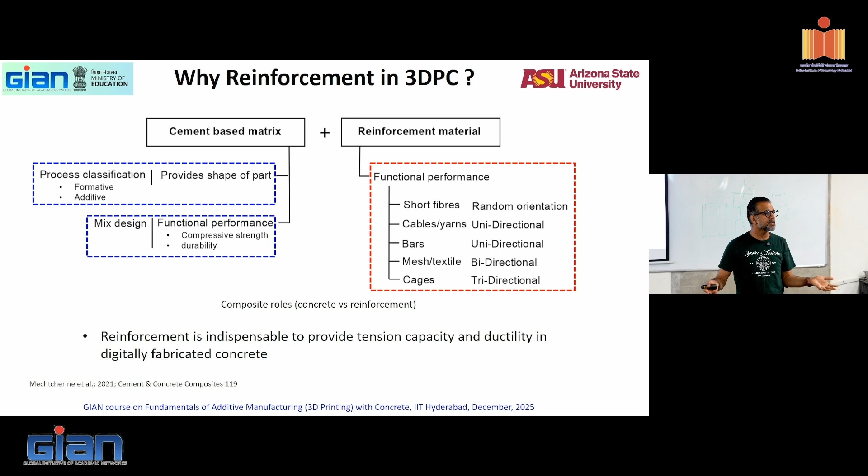But at the end of the day, you reinforce for a function, and the function has to come based on your design, and therefore the reinforcement should follow your design. And the design is not going to be a prismatic member that is conventionally reinforced, because if that's the case, you don't need a 3D print. You can simply put the rebar and pour concrete. There's nothing easier than that. We all have done it for centuries.

All right, so here is reinforcement in conventional concrete construction. Very easy, this is somebody who, you can look at that. So it's a paper on additive manufacturing. So they look at 10 advantages of extrusion-based printing. I don't know why 10, they could have added more.

And then the systems-based approach to evaluation of reinforcement strategies. And they came up with a very nice, even though mostly an academic, but useful framework to find out the suitability and degree of system integration of various reinforcement strategies. Not surprisingly, right? There should be common sense. What is the best strategy that they find out?

Fibers. Of course, right? That's the best strategy. That's what, in terms of suitability and degree of system integration, and then additively manufactured rebar. So as you print your concrete, you have another extruder that extrudes steel also, which means you have a 1600 degrees Celsius melt of your material coming into extrude. Don't know how that happens. You can do it. Or you can do an FRP extrusion.

If you're using fiber reinforced plastic, you can do fiber FRP polymer extrusion along with rebar. But all of those will get infinitely complicated. You look at how organized and how many different activities have to go.

So think about this very simple idea, right? You have to keep on extruding one layer, and then the layers right below have been printed and they are covered with gunny bags that you saw yesterday. They are spraying water. While you are spraying water to prevent shrinkage cracking, can you think about a fiber reinforced extruder coming along with it and getting sprayed with water? Practically there are several challenges of co-extrusion.

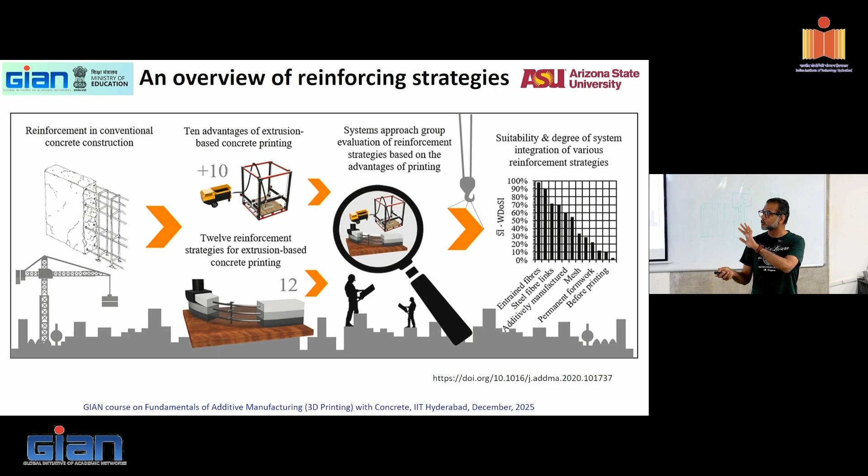Pre-installed wire meshes. You can see here pre-installed meshes, and this nozzle printing in between the wire meshes, squishing the concrete so that it goes in between the meshes too, and then you keep building it up so that both nozzles squish enough and the layers join each other. Two nozzles come together to form one layer, because there is rebar in between, and then the concrete comes in between.

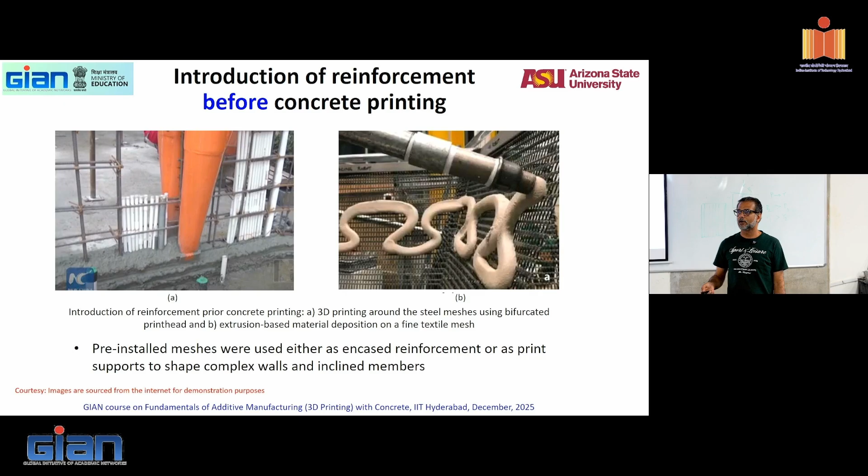Frankly, if you ask me, I would do a formwork if I need that. Correct? It's difficult. It's challenging. I mean, you can do it, but how much coordination, how much work is required? You can do it. It's not that you can't.

Reinforcement integration during printing. Here is another mesh. You can see you have completely redesigned the nozzle. The nozzle now has a lip in the middle, where the mesh is. So you have to position the mesh exactly straight, because your printing path is in that direction. If you manually place that mesh and have a 1 millimeter tolerance difference, at some point your nozzle is going to hit the mesh. So it has to go very precisely through it, which means tolerances become extremely important.

Have we been able in the concrete industry to get to 0.1 mm tolerances? Have we been able to do that? When we are able to do that, this will become an interesting idea. Until then, I can do it in the lab. I can do linear things with reinforcement, but the moment I have a curved section, I'll have to have a bar bender coming in and doing it. It's the same problems I end up with using rebar in concrete. So more challenges in that zone. But again, people have done all of this in a laboratory.

Now, weld joints of reinforcement. I have vertical reinforcement, no problem. I'll put it with horizontal reinforcement. What do I do? When do I go and tie this thing? I can't tie it in, because a tie is going to protrude out, and now my printer will not extrude carefully. Now I have to go and weld there, right? Adds another layer of complexity.

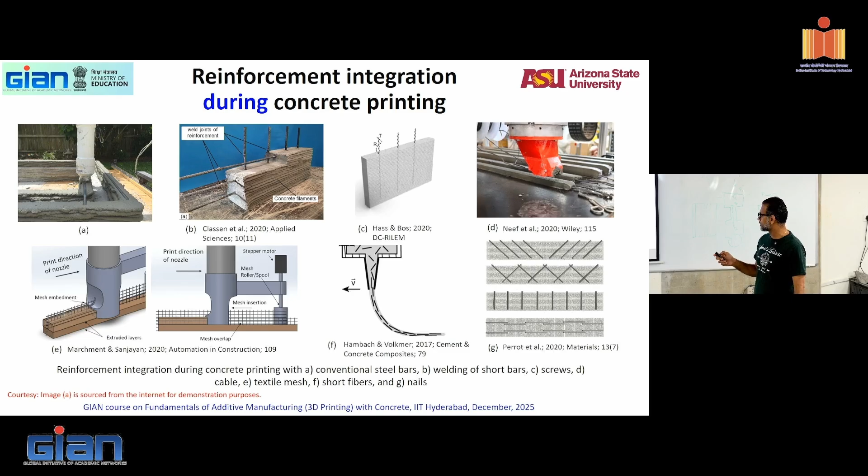That's also possible, it's not that it's impossible. But what is one of the biggest advantages of 3D printing? Reduction of labor. What did you add now? One guy to come and walk along with the printer to put rebar. You're losing another advantage. There is nothing that you gain without losing something. There's always a compromise, that's a choice you have to make. Like I said, I'm not here to give you the answers, I'm here to show you the problems.

Reinforcement integration during printing, the other thing: here is a cut section of something that was printed with reinforcement. You see that unevenness on the sides? It's not going to bond to steel really, really well. So that's another issue. Here is an additively manufactured reinforcement, where the reinforcement itself is all additively manufactured while you're printing it, which means you have a steel company right next to your printing process as you do it.

In a small scale laboratory setup, you can do whatever you want. I can create a Mars vehicle and say I've gone to Mars here in the lab. You created the temperature, the harsh roughness, but you forgot the oxygen. If you go to Mars, you don't have that. The bigger problem is what you forgot - all the easier ones you solve. That's what we do in the lab most of the time: I solve a problem in a condition that is most convenient for me to solve, and you ignore the bigger problem that is in the field.

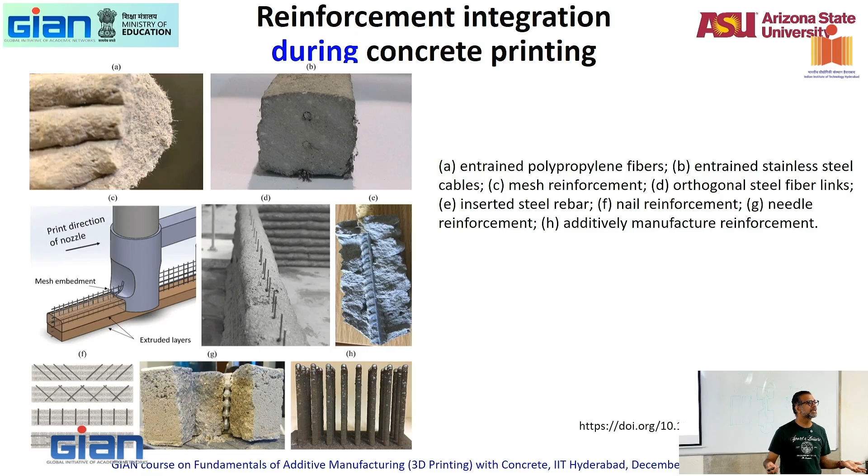I've gotten 200 megapascal concrete. How did I do it? I was sitting for half an hour consolidating this small piece of a cube, and I get so much strength. In the field, I forget that I don't make 5 specimens, and I forget that I can't consolidate 10 cubic meters of concrete sitting like this. In labs you can get lots of things, so translation is where the issues happen.

Here is one example of external reinforcing - a truss system, very similar to what you saw before. They printed the truss system and then had external cables reinforcing it. The problem is, I can put this in the field and somebody comes and decides to cut this external reinforcement, and my structure has no more stability, no more strength. So vandalism is a big problem - structural vandalism, structural fire, people breaking things - very common all over the world.

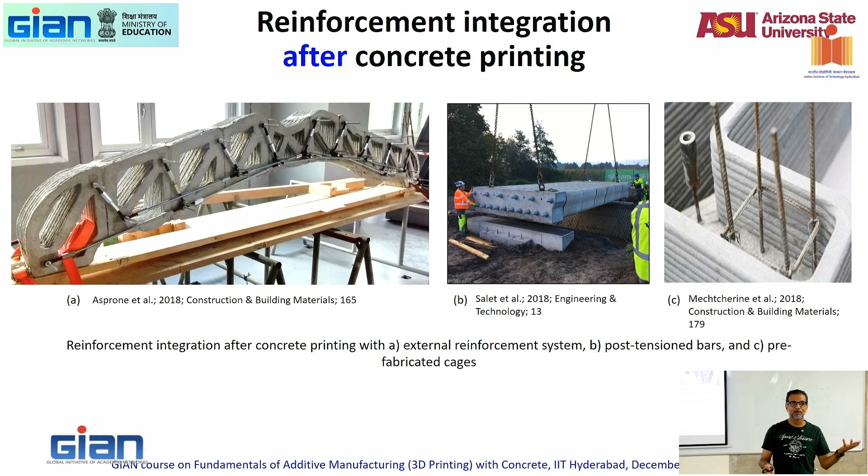So do we have to do that? Are there ways of doing it better? We do all of this - I've done this too in one of the buildings we built in Tempe. At that time, the only way to get the local code official to accept the building was to print the walls and then every 6 feet have columns, physically put rebar and grout in between, leaving the rest of my 30 megapascal concrete useless in terms of load carrying capability, because the entire load now comes through the columns. The rest of it is just sitting there watching - drying shrinkage, no problem, let it shrink, it's doing nothing. But again, these are the practical problems in dealing with these materials.

Reinforcement strategies using steel bar - here you see different shapes again. What they're doing is, after a certain number of layers, they put in rebars. You print these layers, put in the rebar cage, and then you get this. How did you get this from this? Any idea?

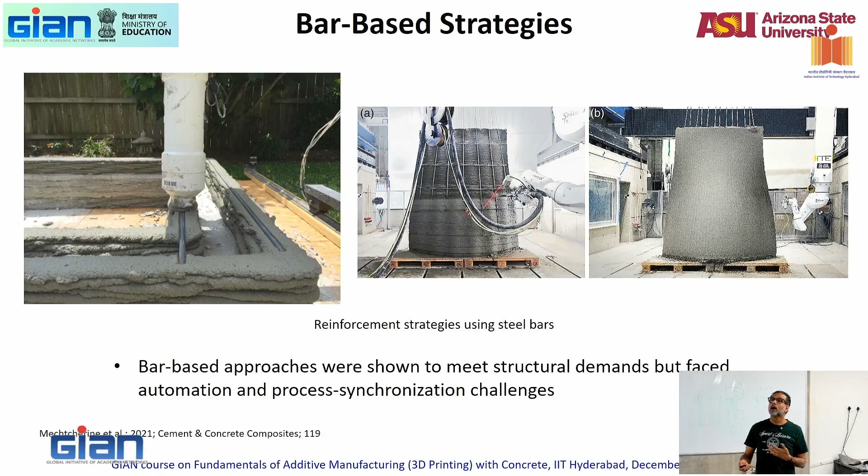Shotcrete on the surface. So you basically print a layer, do the rebar, put all the rebar as per the design, and then shotcrete on the surface to get your structural shape. You get it done faster because shapes can be done only by printing. You have the rebar problem, you need reinforcement, you put the reinforcement, you shotcrete. Unique structures possible.

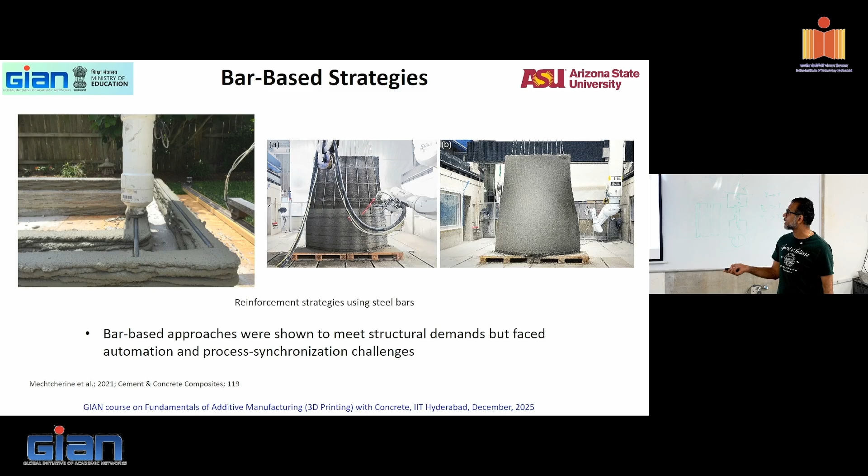Meshes and cages, remember this one I told you? You have a rebar mesh that's put in, but then two nozzles are coming in and doing it, which means you can do it straight, but as long as you start to curve, you will have a problem with shapes. So straight structures, you can do more of this nicely.

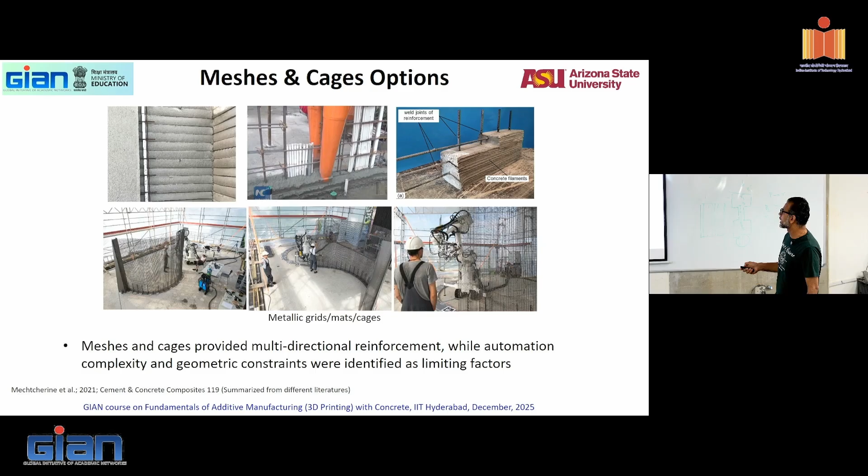We've seen this here, where metallic grids and mats and cages are all being done. Here is a way where cables are being interlaid through the nozzle, an interlayer integration. The nozzle is putting your concrete in, and then a cable puller is pulling a cable on the layer below. So you have a cable puller placing the layer, and once you end it, you might cut it, and the cable won't be there anymore, but the concrete will go continuously. So instead of a man placing a rebar, you have an automated machine placing a cable. Process principle exactly the same, and you can do that as well.

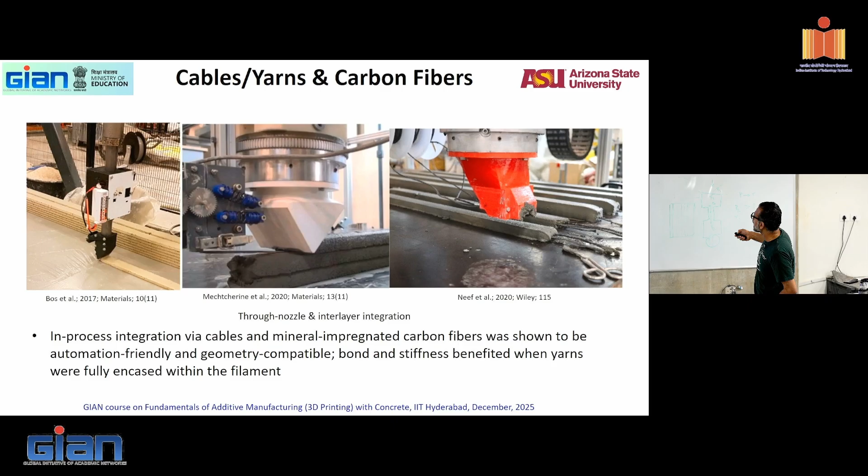Here is another way in which you have put in rebar and placed it the same way. You have these two different nozzles coming in and covering the rebars, so you can do that as well. If you have lots of different meshes, then you adjust your nozzles in such a way that you can drive through this, like a web getting more and more complicated. Mesh insertion.

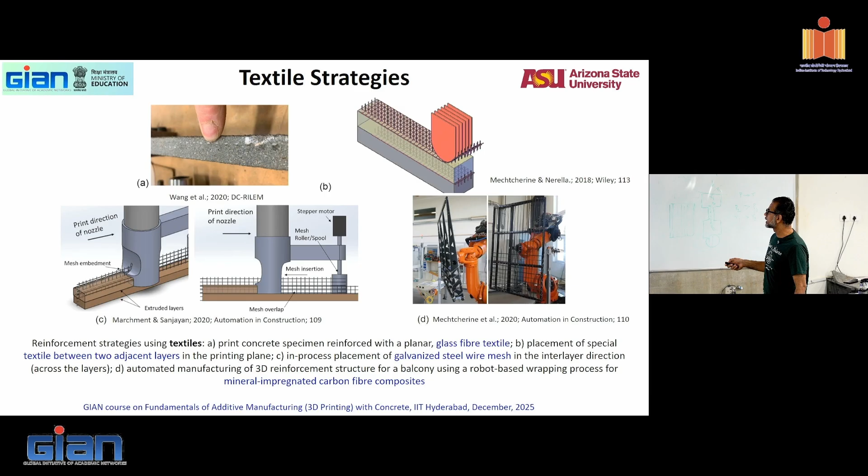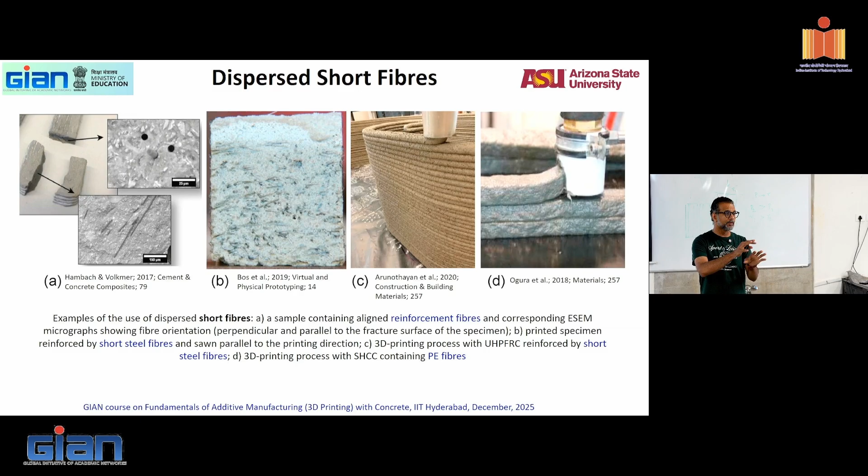The other interesting way, I showed you this, where you print a few filaments and then physically place reinforcement in whatever direction you want. Here is where you can do steel bars, and penetrate them. So you build all these layers up, and then you figure out that you need reinforcement, so you take a steel bar and squeeze it in through your concrete. Tell me what will happen if I do that.

Well, if I do it very, very carefully, it may not collapse, but then I'm disturbing the concrete and disturbing the layers, and I have to do it before it sets completely so that I don't exert extra pressure and crack the inner layers. It all has to be so coordinated. Even if I drill it, I have to be so concentric in the process. Even a slight eccentricity in movement is going to create a gap that is slightly larger than the size of the reinforcement, and your bond is gone completely, which means it has to be done with so much precision. So people said, okay, that's more complicated, I'll find another way, I will screw this down.

That's now even smarter. If you screw it, it's a helical motion, and now I'm really not having that problem. All I need is the way you drill a screw into your wall - your motion is axial, but your motion into the wall is helical. When you have helical motion, the force that is exerted is going to be smaller inside, and there is continuity where the bond is actually a little better. So what do you want? You want a screw-like reinforcement to go in a helical way. That's another way of doing it.

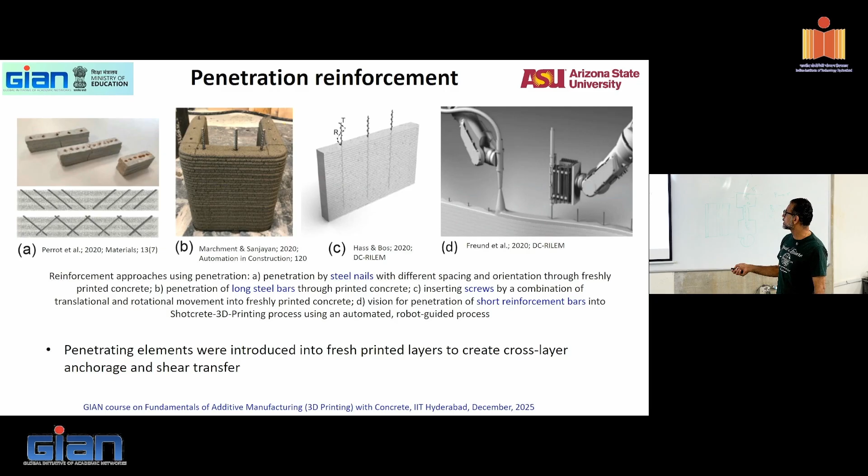Penetrating elements create a cross-layer anchorage and shear transfer. Some process flow examples of how to do that: placement of reinforcement during shaping. How does a multi-step process look like?

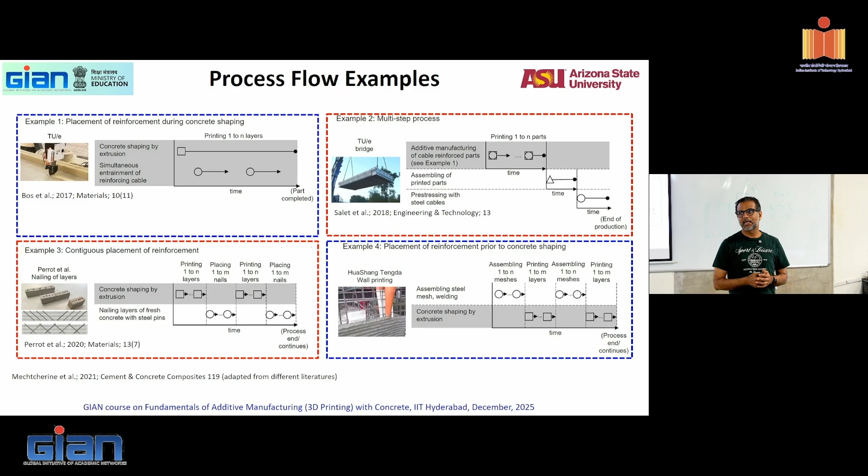Contiguous placement of reinforcement prior to concrete shaping. There are lots of different ways, and what this requires is not going in the morning of your printing to figure out where to do it. All of this requires lots of planning ahead of time.

Split flow nozzle, I showed this a little earlier. Here is how the nozzle will look like, with your mesh rebar kept in, and the nozzle flow. Remember, in the previous one, I showed you two nozzles, coming in and squeezing enough so that material will flow.

Can anybody think of Wednesday and Thursday and tell me what the problems would be in that case? What did we do most on Wednesdays and Thursdays? Rheology, right? So when two nozzles are extruding, and I'm leaving a space in between expecting the concrete to squish and push between them, what do I need? I need much more flowable concrete.

What is a problem when we have much more flowable concrete? Shape stability is going to be a problem, correct? You're not going to be able to retain that shape well. If shape stability is a problem, what is the next immediate problem? Buildability will be a problem, right? So yes, I've solved the problem where I can put steel and let the concrete flow and join, but then I'm sacrificing my buildability and shape stability. That's the problem with two nozzles.

So they were smart enough to say, okay, that's a problem, let's do it with one nozzle. How do I do it with one nozzle? I create a split flow pattern. You see here, same nozzle, but I create a split flow pattern so that I can place a layer like that. Smart way, but have you completely eliminated the rheology problem?

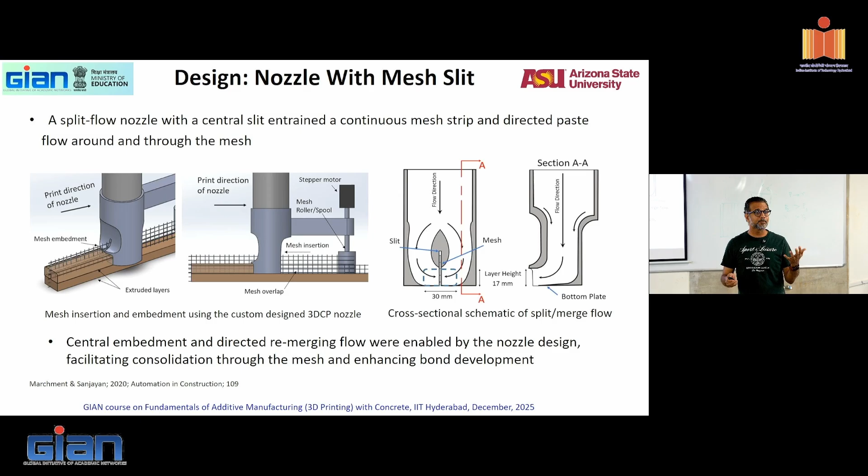No, you still have issues with shape stability and all of that. In these pictures it will look very good, but when you start to print you will have sideways flow and things like that. So none of these methods are foolproof as of now. Of course, advances and developments will happen, but these are things people are very actively working on.

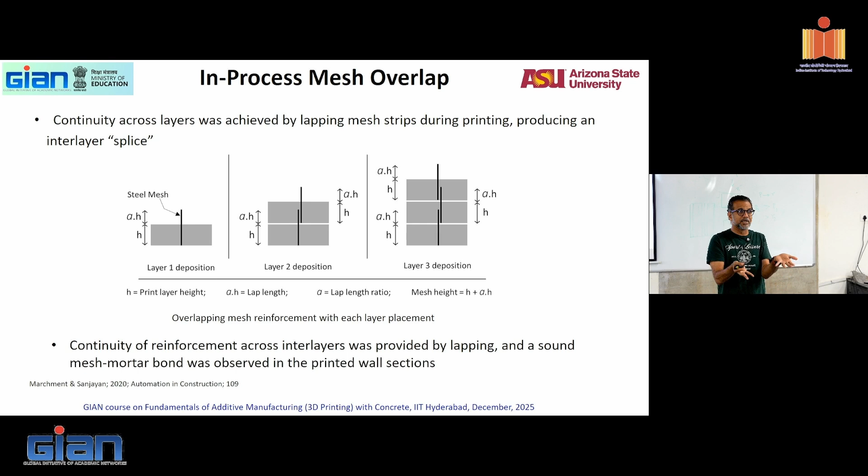Continuity across layers. Look at these steel mesh strips, how they've integrated steel mesh strips across layers. So now you start to reinforce across layers because you need reinforced lateral resistance. If you need only axial resistance, I wouldn't care, right? Why would I need this? If you need lateral resistance, you would need that.

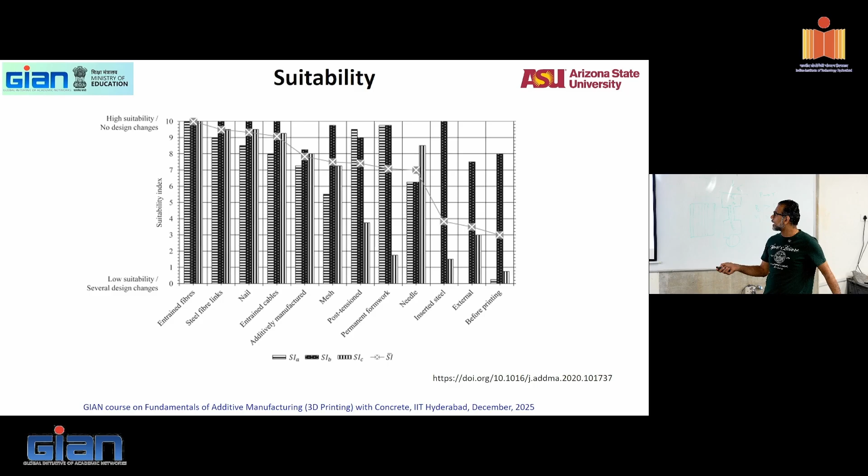Suitability, I showed you this. The fibers were the best one. Steel fiber links, you could do it, and everything else down the line, not all that good. Permanent formwork, post-tensioned, additively manufactured steel, nails - all of those have their own issues.

And then, of course, if you do this, you can do something very similar. We actually have done some work on this, not with reinforcement, but where we can redo it, hypothetically. We did this and I'm not showing it in this set of presentations. But what we did was, for example, if I'm 3D printing a really load carrying member,

and I know that I have the capability to do shape and topology optimization. But if I'm not doing a very efficient shape and topology optimization, if I'm still creating a layered structure, can I start to do a multi-material system? Can I optimize the material? One very good material where I want all the good properties, and one not so good material where I don't want that.

Can we do multi-material optimization? We have done this with UHPC and conventional concrete. When you design, for example, a beam, you cannot use conventional beam design, because every layer will be under a different state of stress. So you have to use composite laminate theory. We've published that as well, so you can look at that. You can use that same laminate theory idea, exactly the same one, where basically one of the layers is steel.

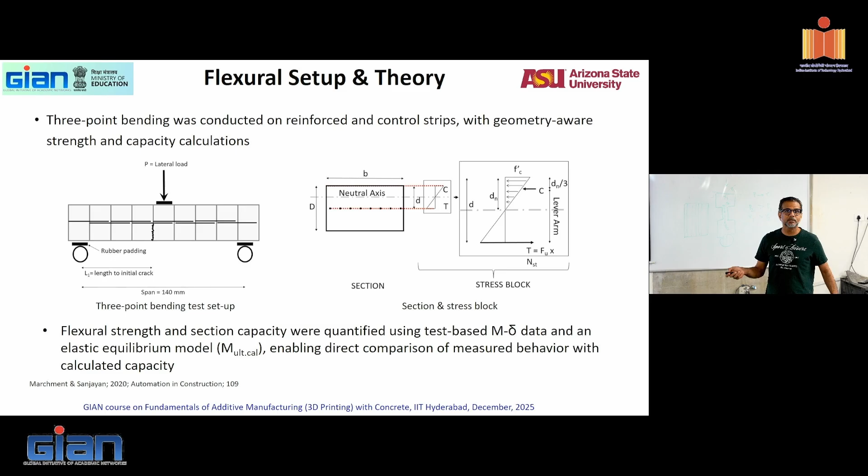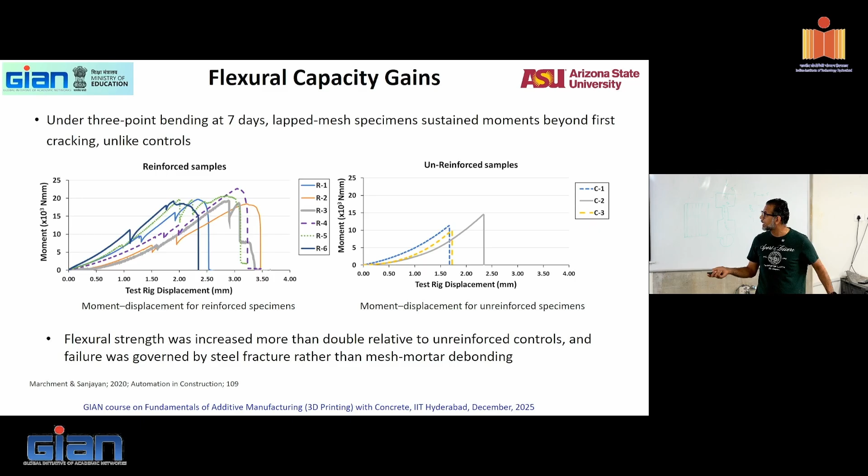Lapped mesh specimens can sustain moments way beyond cracking. When you have mesh that's lapped, it can take moments in both directions, so capacity will obviously be higher. Failure modes show cracking for materials like that.

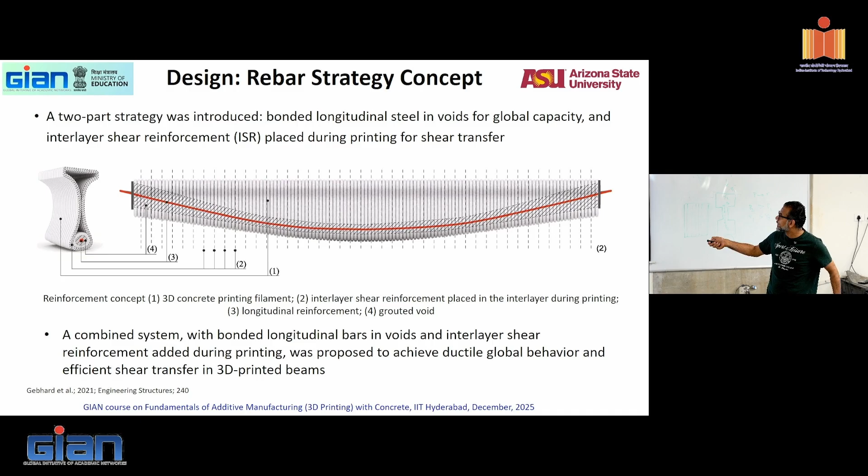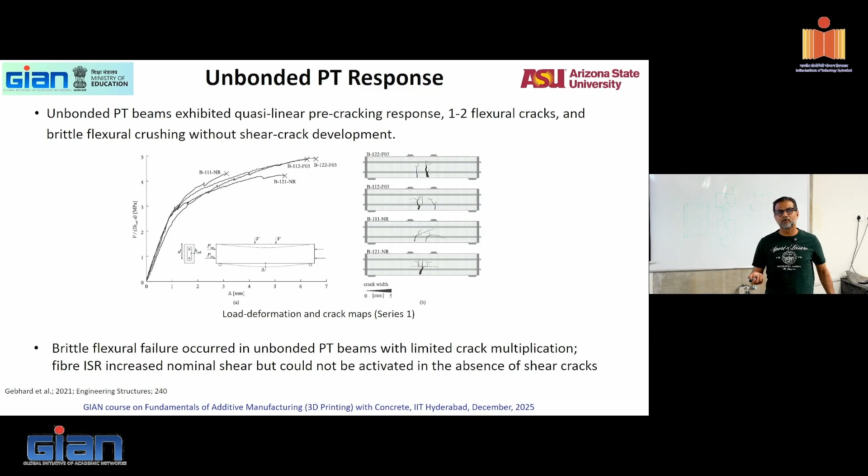Post-tension, bonded bars, unbonded post-tension beams, lots of things that you do in a traditional manner.

In-nozzle textile embedment is another thing, same two-nozzle story that I mentioned. Because you have to put in a textile, you develop a nozzle that has space for it, and they've done it craftily in several different ways. Concrete comes through and then splits into two, so you don't have to have two separate nozzles, one branching off into two, to create two layers, one here and one here, using AR glass textile reinforcement.

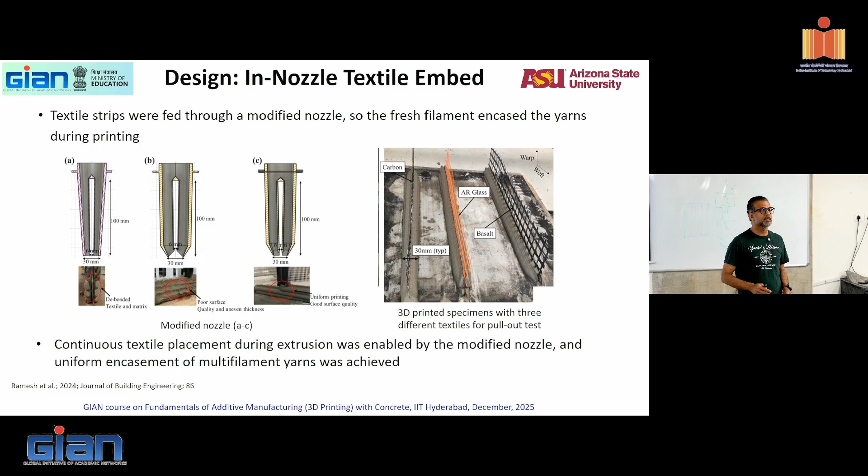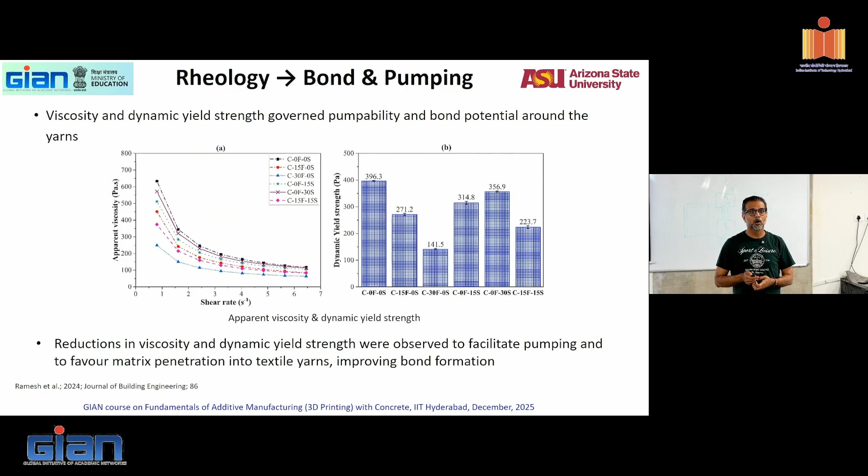You can place textile reinforcement along the layers also to get interlayer shear transfer. Rheology, bond, and pumping, bond potential - again, any of these strategies, rheology becomes important. Your rheology now is different, to account for all of these processes as well. So again, we go back to where we started.

So CFRP, because you can do it ahead of time, you can do that cage - very similar. It doesn't have to be CFRP. You can do meshes, you can do textiles, you can do all of that exactly the same way. Another interesting way of doing it.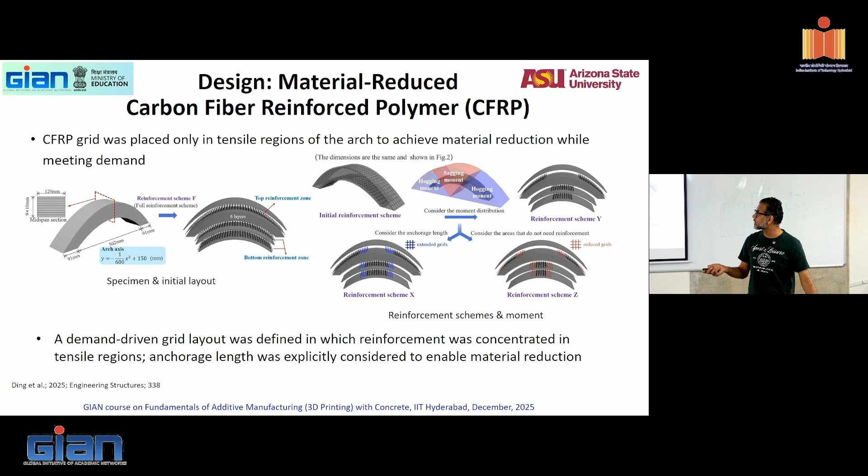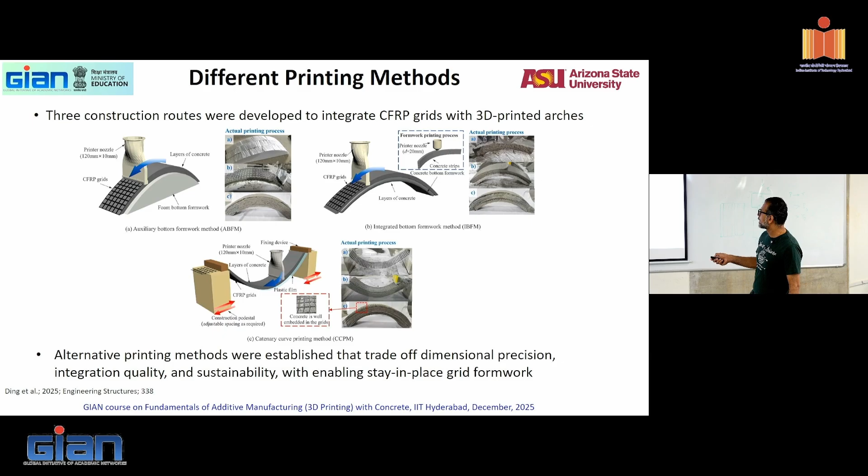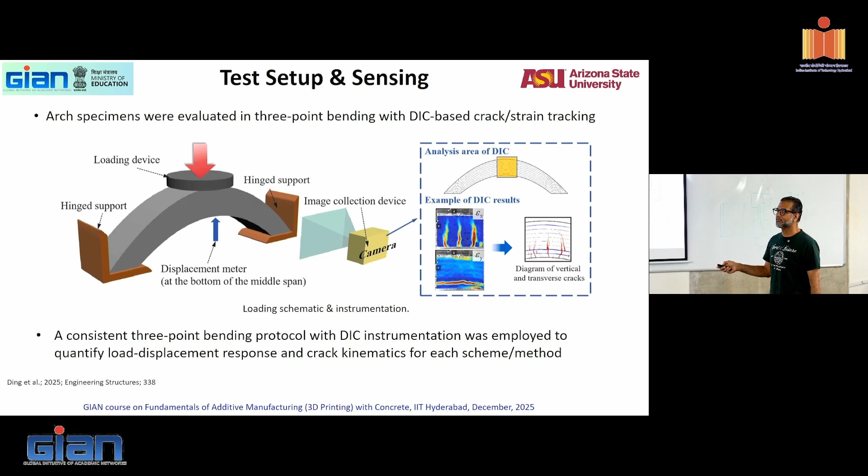And then how do you print on top of that? This is a schematic printing way - how do you print on a curved layer? You see this, layering curved on top of that, and then you get extremely high performance. So you do that and look at what kind of load patterns, what kind of failure occurs, because you have different reinforcements, grid scheme, cell skip, all of that. Effectively, the bottom line is you have so many different ways of putting rebars.

There is nothing that is the best way and not the best way. It depends on how your structure is, what you want to do. But your best option so far, at least from whatever literature we have, is to use fibers so that you're consistent in what you're able to achieve.

If you really want rebars, reinforcement in certain directions, then choose your design wisely, choose a rebar strategy wisely, make sure that you design the element carefully, do all the finite element analysis, whatever you do need to make sure that the adequate stress transfer stresses are all taken care of before you do it.

But if you have to do it, there are several different methods possible, as simple as just putting a layer of rebar, or putting a vertical rebar and grouting, to putting in a mesh of rebar and changing your nozzle patterns to do it through, or pre-printing rebars and putting them on top, or nails or screws. Lots of different strategies to implement if you ever have to.

This is the idea of wire arc additive manufacturing. I'm sure you will have a WAAM system on campus here, because if you have to build a 3 meter high metal additive manufacturing structure, you will have it. So you can integrate a WAAM with 3D printed concrete. But then you're extruding a metal along with extruding a concrete.

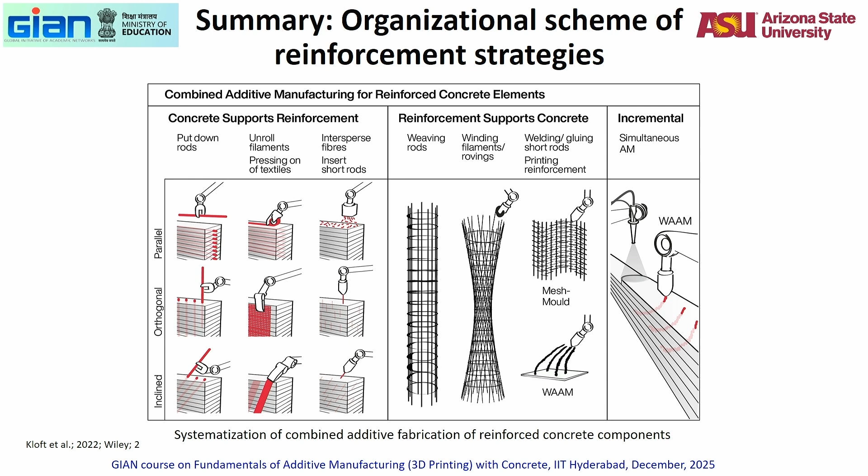So COBOD eventually printed it for offshore wind towers. They did this structure with a large diameter at the bottom, curving inwards and then building out further. What they did was every 3 layers, textile reinforcement for interlayer shear transfer at a certain height, at a certain spacing, to create kind of pylons within your structure itself, on which it is 3D printed.

So it's basically like a double shell - one big outer shell, and this inner shell with localized reinforcements, to take care of it because it was going 25 meters high. So that's what they eventually did, but they couldn't do 25 meters high.

I think they have a 3-story high printer, so they can do, I think, 10 or 12 meters high. So they actually did it in 2 sections, so that section 1 and section 2, with a crane, they'll put it together somehow. I don't know how. So they did reinforce with multiple reinforcing options. That's the largest reinforced structure that I know of, a complex structure.

Of course, there are buildings that have been built, but all the buildings that have been built have roofs that are non-3D printed. So the biggest flexural members are taken care of separately. The compression, they simply inserted rebars and grouted some places and created stronger walls essentially. But the bigger, complicated rebar structure

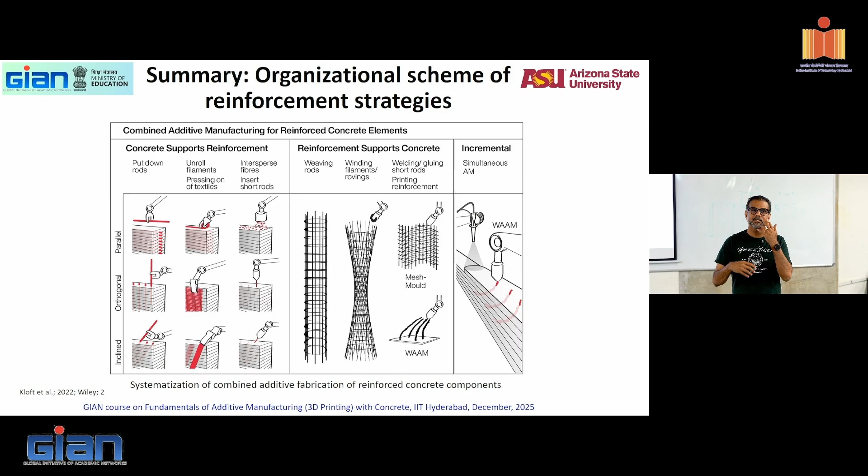that I have ever heard about - I haven't seen it, I've read about it - is this wind turbine support structure. That's the only one that I know. The rest of it, most of it, are restricted to experimental work. Still a lot to develop. So don't ask me too many questions on this because I haven't worked on any of these. I know only as much as you know on this, and I've put in all the references for you to read, get up, or whatever you need.

Like this textile reinforcement is what it is. So textile reinforcement is like you weave things, right? So you have mats that are woven in different directions, so they have good strength in both directions. So it's basically a textile - fibers, so think about continuous fibers in both directions. You can do well. Cotton, silk are the textiles that we use to weave.

These textiles could be natural, could be synthetic, like polymeric fibers, could be aramid, could be even wire mesh. You could consider it as kind of a textile pattern. And the thing is, how this can be compared with steel fibers to normal reinforcements?

So, steel fibers have the same tensile strength as steel—steel is steel, right? But same percentage of reinforcement doesn't mean the same effect. When you distribute something versus when you do one single reinforcement, that's a completely different strategy.